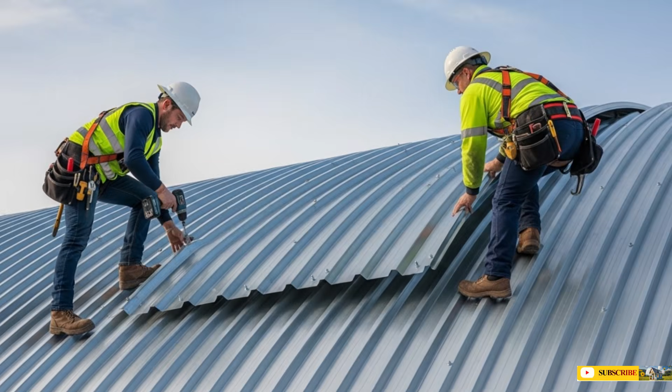Did you know that one of the smartest, most durable, and most eye-catching roofs you can put on a tiny house costs a fraction of what most people spend, installs faster than a traditional gable, and has been quietly holding up barns, silos, and military bunkers for over 80 years? We are talking about curved and arched roofs made from corrugated metal panels or repurposed silo material. And in 2026, this design is having a serious moment in the tiny home world, for very good reason.

If you have ever seen one of those swooping, dome-style tiny homes and wondered how it was built, what it costs, and whether you could actually do it yourself, then you are in exactly the right place. Stay with me to the very end of this video, because I'm going to break down the real numbers, the real challenges, and the real DIY possibilities that most builders never tell you about. This is the full picture, honest and data-backed, no hype.

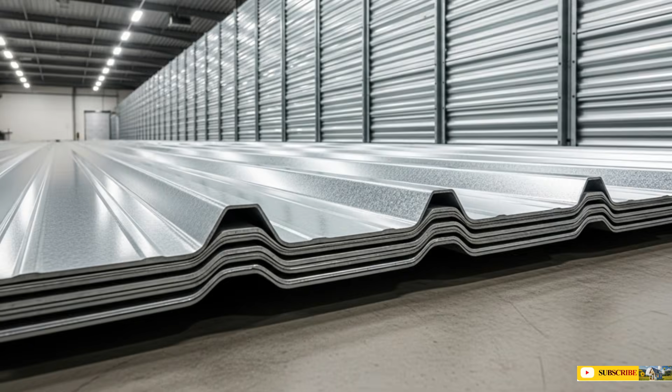When most people think of a tiny house roof, they picture a simple gable or maybe a shed-style pitch. Both work great. But a curved or arched roof is something different entirely. It is structural art, and the materials used to achieve it, specifically corrugated metal panels and repurposed grain silo sheeting, are genuinely brilliant choices for small structure builds. Today we are covering 4 big areas: what these roof systems actually are and where they come from, why they work so well on tiny homes, the real verified costs in 2026, and what a DIY build actually looks like step by step. Let's start with the basics.

A curved or arched roof follows a smooth arc instead of a peak or flat line. Think of an upside-down U or a gentle wave. On tiny homes, this can span the full width of the structure or serve as a partial accent over one section of the build. The shape is not just for looks. An arch is one of the strongest shapes in all of architecture. It distributes weight outward and downward along its curve, eliminating the need for internal supports or heavy ridge beams. That means more usable interior space and a lighter overall structure, both of which matter a great deal when you're building small. 2 main materials make this possible for tiny home builders in 2026.

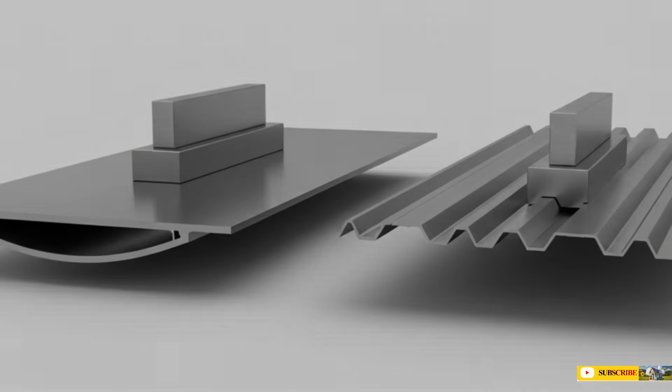Option 1, corrugated metal panels. These are the ridged or wavy metal sheets you have probably seen on old barns and sheds. The corrugation pattern is what gives them their structural strength. The wavy profile increases tensile strength dramatically compared to a flat sheet of the same thickness. And because metal is naturally malleable, these panels can be pre-curved or field curved to create smooth arching roof lines without welding or complex framing.

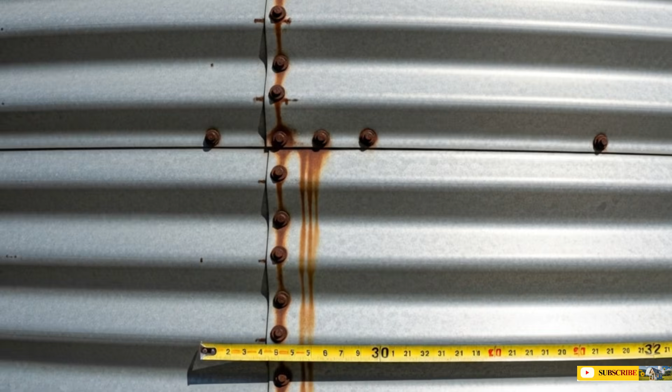In 2026, corrugated panels come in galvanized steel, Galvalume, aluminum, and pre-painted steel in dozens of colors. You can order them factory curved to your specified radius, or in some cases bend them on-site with a simple roller tool. Option 2, silo or grain bin material. This is where things get really interesting. Grain silos and bins are built from corrugated steel panels that are specifically engineered to form a curved, cylindrical structure. When those silos are decommissioned or replaced, their panels become available as salvage material at a fraction of new steel pricing. Builders have been repurposing these panels for decades, using them for everything from garden sheds to full residential homes.

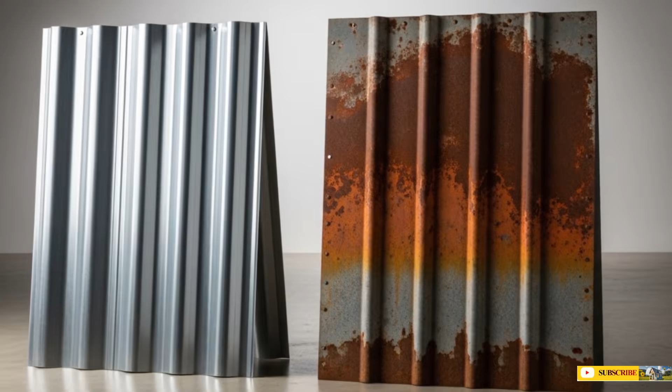For a tiny house roof, curved silo panels can be stacked and overlapped to create a beautiful arch profile that is incredibly sturdy and surprisingly affordable. Pro tip for 2026. Many modern silos use G115 or G90 galvanized coatings, which are superior industrial-grade coatings compared to standard roofing steel. When you source salvage silo panels, you are often getting higher-grade steel for lower-grade prices. That is a genuine value that most people overlook entirely.

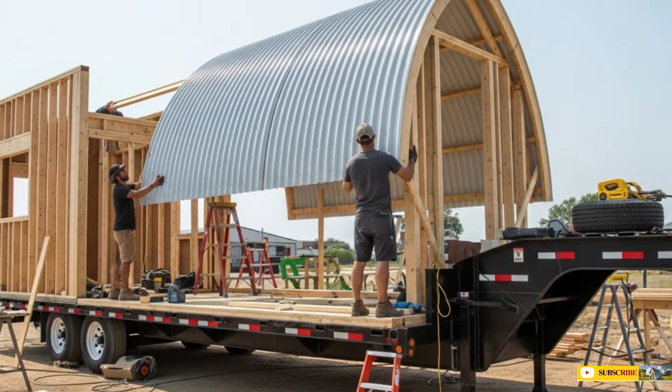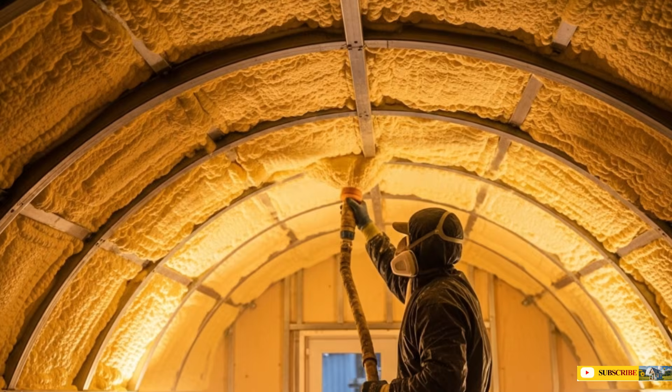There are 5 strong reasons why curved and arched roofs make a lot of sense, specifically for tiny home construction. Reason 1, structural efficiency. The arch distributes load beautifully without needing heavy rafters or ridge boards. On a tiny home where every pound of structural weight matters, especially if you're building on a trailer, this is a real advantage. Less framing weight means more weight budget for insulation, finishes, and living. Reason 2, headroom and loft space. One of the biggest complaints about tiny living is the feeling of being cramped.

A curved roof naturally creates more volume at the center of the space. Instead of steeply pitched walls cutting into your headroom, the arch gives you a wider usable zone at full standing height. This matters enormously when you are working with 200 to 400 square feet of living space.

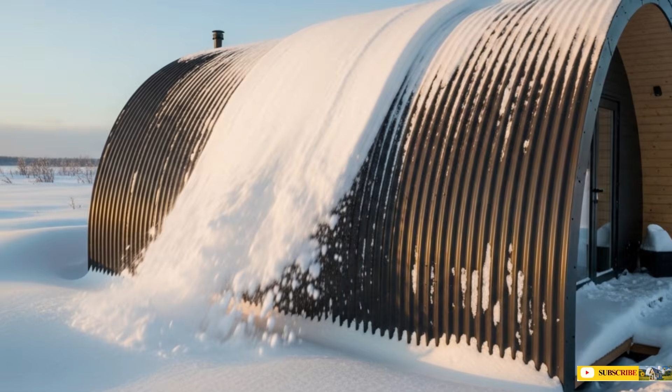Reason 3. Weather performance. The curved profile is exceptional at shedding water, ice, and snow. There are no flat valleys or complicated flashing points where water can pool and eventually find its way inside. Rain runs cleanly off the curve. Snow tends to slide naturally rather than accumulate, which is a major structural and maintenance advantage in cold climates.

Corrugated metal panels resist wind speeds up to 140 miles per hour when properly installed. The arch shape also reduces wind load by allowing air to move around the structure rather than pressing flat against it.

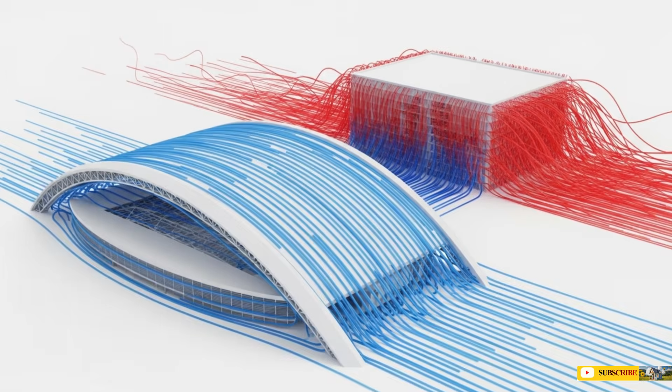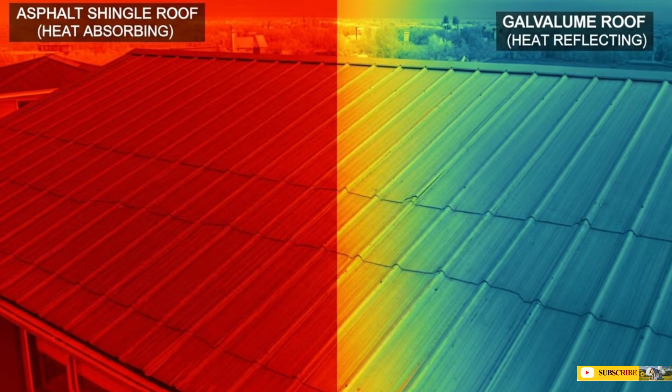Reason 4. Energy efficiency. Metal roofing reflects solar radiant heat rather than absorbing it. That reflective quality can reduce your cooling costs by 10 to 25% compared to asphalt shingles in most climates. In 2026, Cool Roof certified Galvalume panels in high sun states like Arizona and Texas have shown cooling cost reductions of up to 40%. For a tiny home where your energy costs are already modest, that is a meaningful long-term advantage.

The arch also creates a natural air gap between the metal surface and your interior ceiling, which helps with thermal performance when combined with proper insulation.

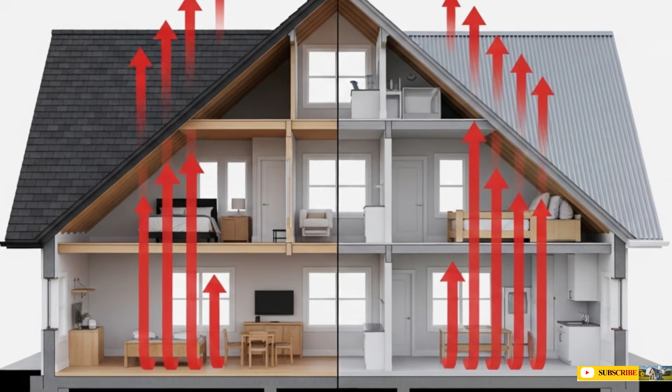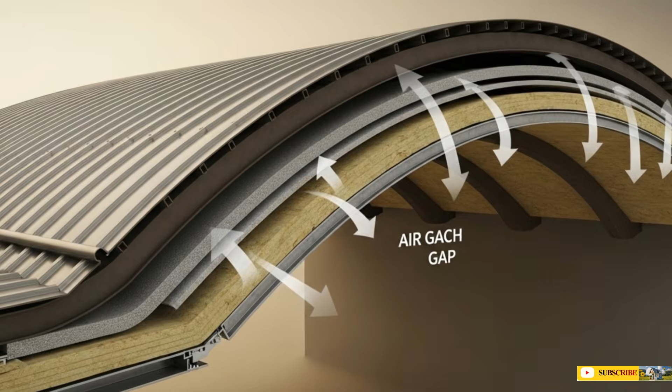Reason 5. Longevity. This is where metal roofing separates itself from everything else. Corrugated metal roofs last 40 to 70 years, depending on the material and coating. Galvanized steel gives you 40 to 50 years. Galvalume, which combines steel with an aluminum zinc alloy, extends up to 50 to 60 years. Aluminum in coastal environments can reach 60 to 70 years.

Compare that to the 15 to 25-year lifespan of a standard asphalt shingle roof, and the economics are stark. You may install a corrugated metal roof once and never need to replace it.

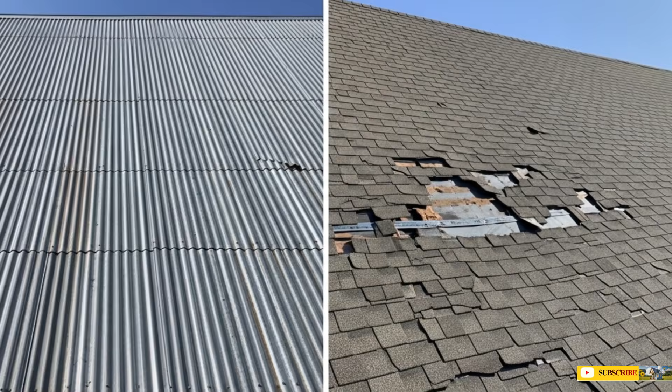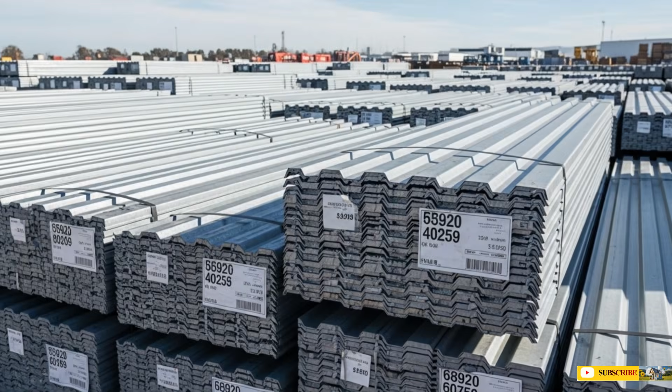Alright, let us talk numbers. These figures reflect the verified 2026 market, and I want to be precise because outdated pricing can seriously hurt your budget planning. Corrugated metal panels. Installed cost. For standard corrugated metal panels, the 2026 national average for galvanized steel, specifically R panel or 7/8 inch corrugated, runs between $5 and $12 per square foot installed. Material only for 26 gauge steel is hovering around $1.50 to $4.00 per square foot before installation labor.

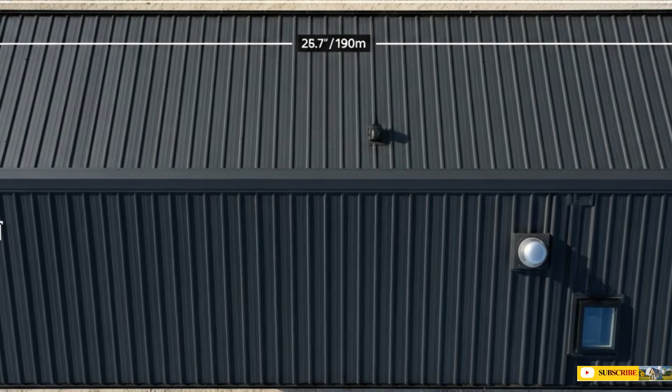Galvalume panels, which offer superior corrosion resistance and heat reflectivity, run approximately $6 to $13 per square foot installed. The premium over galvanized steel is real but modest, and for most tiny home applications the performance difference justifies the gap. For a typical tiny home roof surface of 300 to 500 square feet, panel materials alone can run roughly $450 to $2,000. Installation labor adds significantly on top of that if you are not doing it yourself.

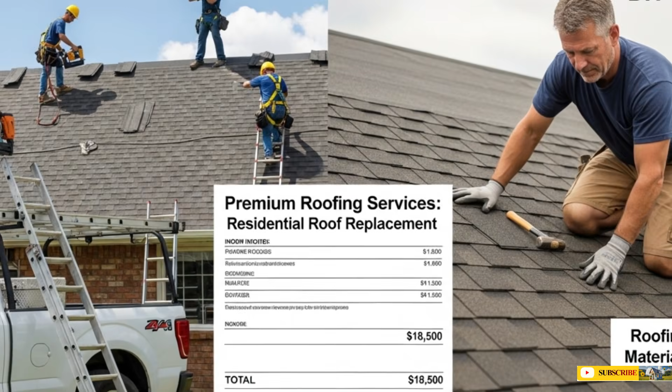Quonset-style arch kits. For a complete arch structure in kit form, a 20 by 30 Quonset package, which gives you 600 square feet and is a very workable tiny home footprint, currently retails between $12,000 and $15,000 for the shell. High volume and bulk buyers often see this drop to the $10,000 mark for the shell only. More than 75% of Quonset kit buyers assemble their structures themselves, which cuts project costs by 20 to 30% compared to hiring a contractor for the full build.

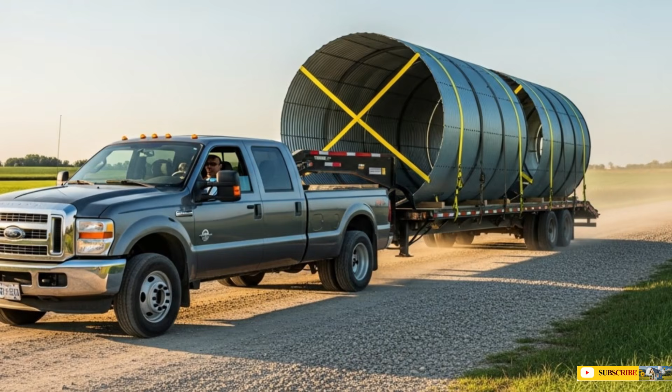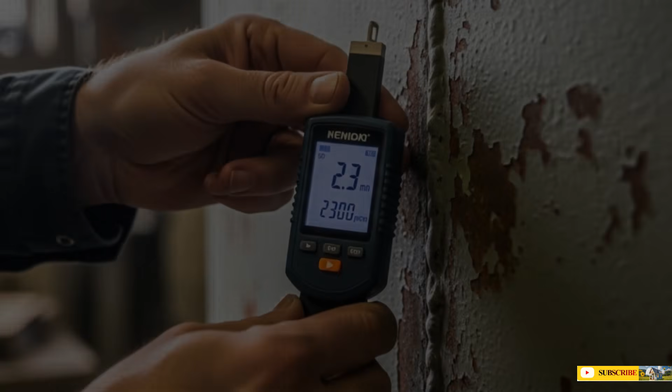Salvage silo panels. The budget option. Decommissioned grain bin and silo panels can be sourced for as little as $0.50 to $2.00 per square foot in rural markets where grain operations are common. You will need to factor in transportation, surface inspection, and additional sealing, but the raw material savings can be dramatic. And as I mentioned earlier, those salvage panels often carry industrial-grade G90 or G115 coatings, making this one of the best value plays in DIY tiny home roofing right now.

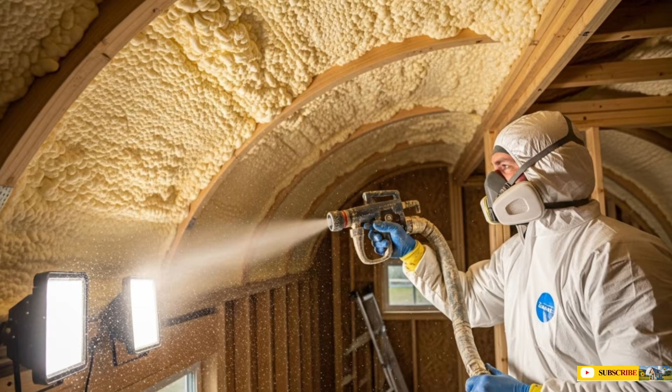Insulation cost update for 2026. Spray foam costs have shifted. Closed-cell spray foam, which is the preferred choice for metal roof applications because it acts as both insulation and a vapor barrier, is currently averaging $2.00 to $5.00 per square foot for a standard 2-inch thickness.

For a complete tiny home insulation job, the total installed cost typically lands between $3,000 and $6,000 when you factor in full roof coverage. Fiberglass batt insulation remains an option at lower upfront cost, but for a curved metal roof where vapor management and thermal bridging are real concerns, closed-cell spray foam is the more reliable long-term choice.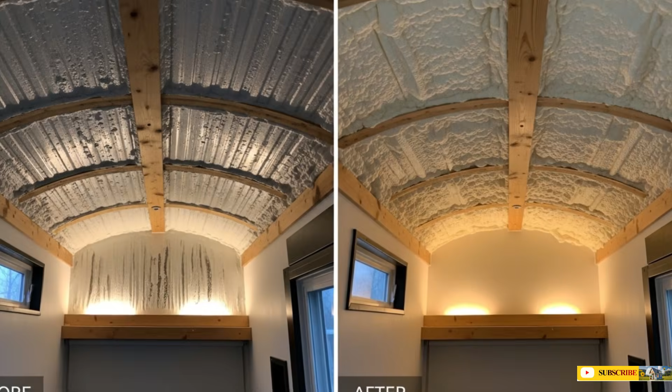An honest caveat: steel prices continue to respond to global supply and demand. The ranges shared here are solid 2026 reference points, but always get current quotes from local suppliers before finalizing your budget. Your actual numbers will depend on your location, project size, and market conditions at the time of your build.

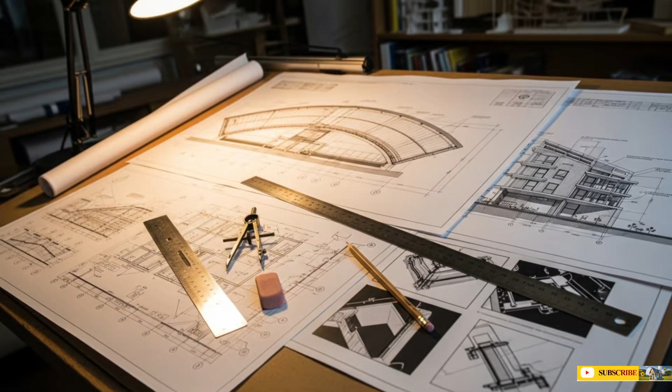This is the section I really want you to pay close attention to, because there's a right way and a wrong way to approach a curved roof build. Step 1. Design and engineering. Before you touch a single panel, you need a plan. Curved roofs require a defined radius, and that radius determines your framing, your panel specifications, and your structural load calculations. If you're using a Quonset kit, the engineering is done for you.

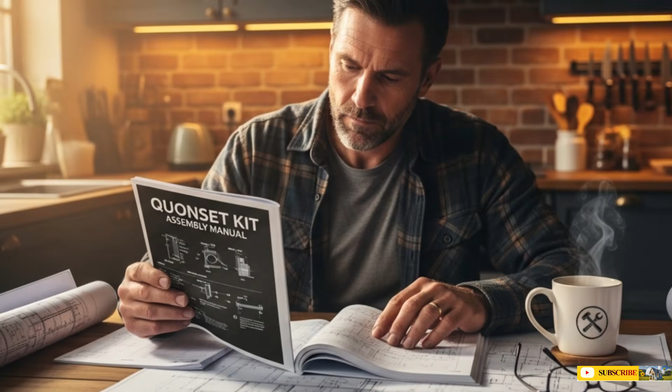If you are custom designing a curved roof over a traditionally framed tiny home, you either need to work with a structural engineer or use an established design template with a stamped approval. Do not skip this step. The arch is exceptionally strong, but only when it is correctly proportioned and anchored.

In 2026, most jurisdictions following the IRC 2021 or IRC 2024 building code, including the Appendix Q provisions that govern many tiny homes, require engineer-stamped drawings for unconventional roof structures. Getting that stamp early saves you from expensive redesigns later and adds credibility and authority to your build documentation.

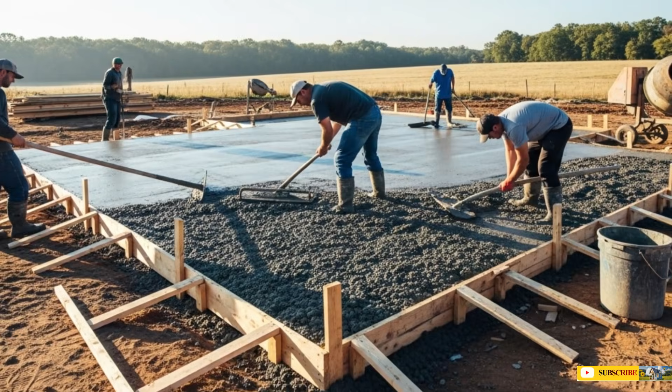Step 2. Foundation and base frame. Your curved roof needs a solid base to attach to. For a tiny home on a trailer, this means a robust steel chassis with properly engineered wall plates. For a ground-level build, a concrete perimeter foundation or full slab is standard. The arch panels transmit their load outward at the base, so those connection points need to be rated correctly for your local wind and snow loads.

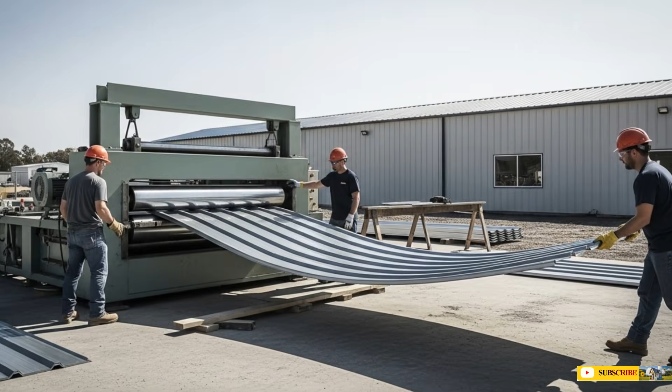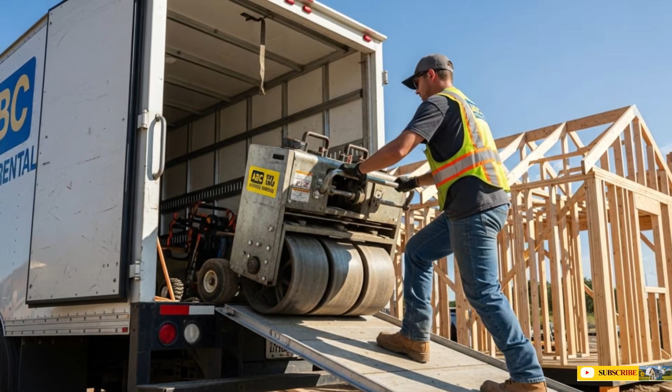Step 3. Panel curving. If you are not using pre-curved panels, field forming happens at this stage. A metal roller or slip roller bends flat corrugated panels to your desired radius. This can be done on-site with rented equipment. The key is consistency. Each panel needs to match the same curve, so your roofline is smooth and uniform. Pre-curved panels ordered from a manufacturer eliminate this step, but add to material and freight costs, since curved panels take up significantly more shipping space than flat ones.

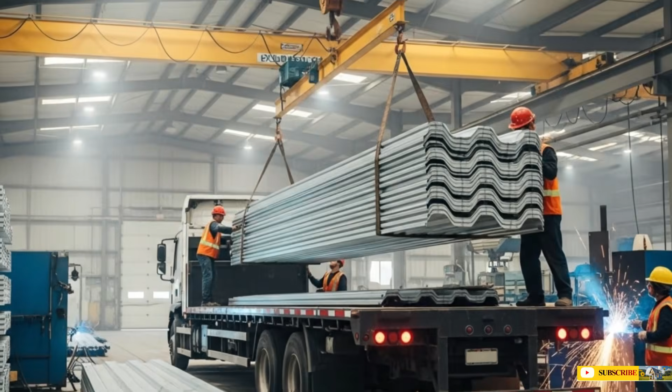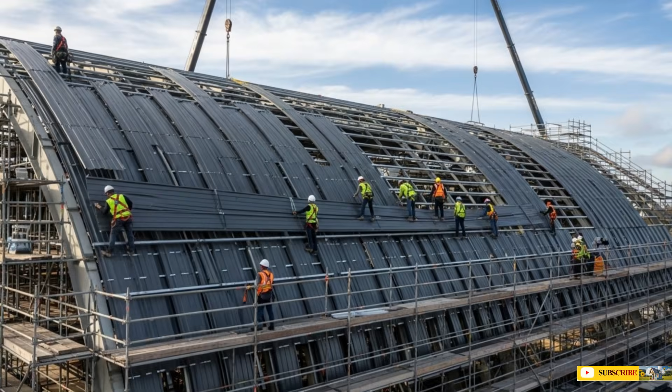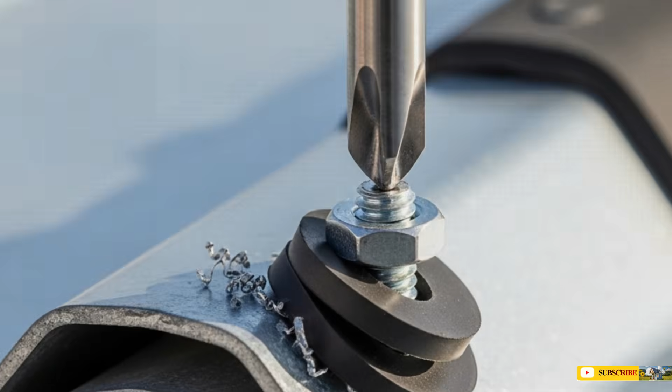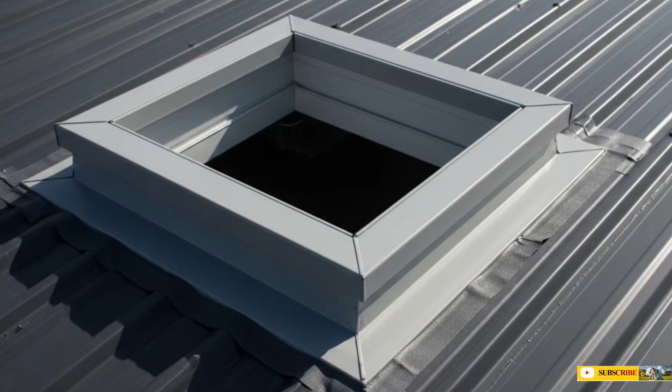Step 5. Sealing and flashing. Seams, edges, and any penetrations for vents, skylights, or chimney pipes need proper flashing and sealant. Butyl tape and metal-compatible caulk are your core materials here. Take your time with this step. The curved profile keeps water runoff clean, but any penetrations need the same careful treatment you would give on any other quality roofing system.

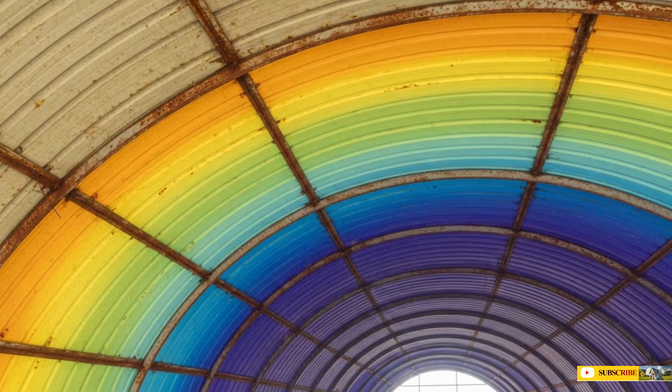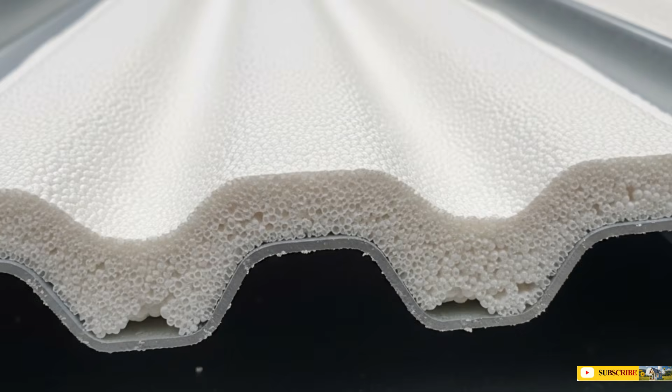Step 6. Insulation. Corrugated metal on its own provides essentially no insulation value. You need insulation beneath the panels, and for a curved metal roof, the choice matters more than people realize. Closed-cell spray foam at $2 to $5 per square foot installed is the preferred option. It bonds directly to the curved metal interior surface, fills every gap, acts as a vapor barrier, and turns the whole roof assembly into a continuous thermal shell.

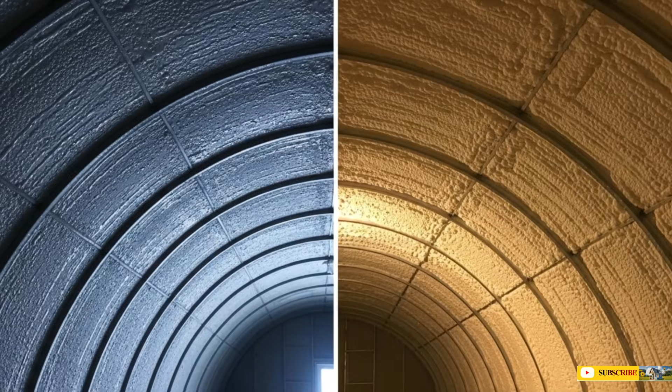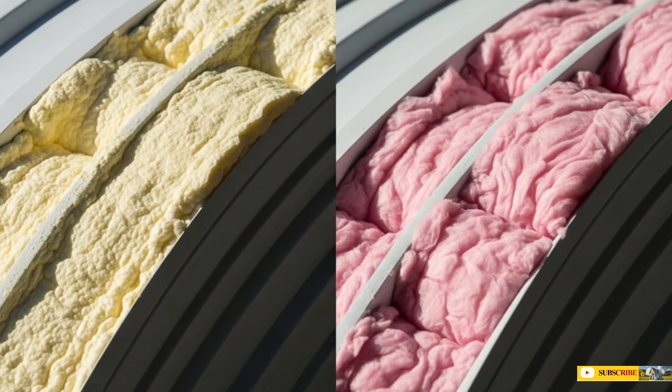For a tiny home where temperature control and moisture management are priorities, this investment pays back over time in energy savings and reduced maintenance. Fiberglass batt is less expensive up front, but requires very careful vapor management with metal roofing, and does not conform as cleanly to a curved surface. If the budget requires it, it can work, but plan for additional air sealing labor.

Snow load and snow guards. The smooth curved surface is excellent at shedding snow, but that also means when snow releases, it comes off fast.

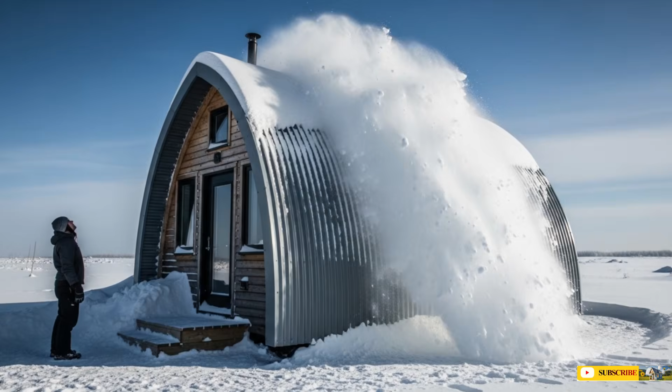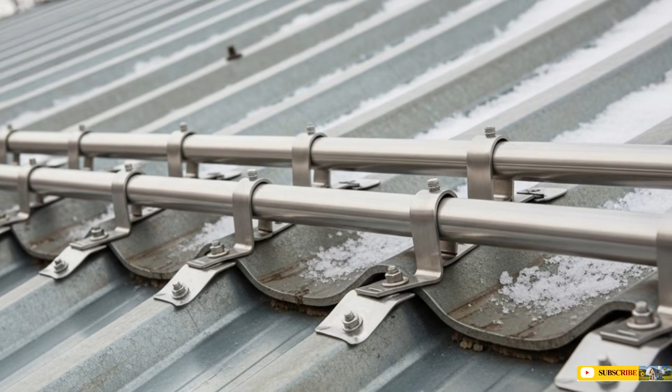In 2026, local codes in the Pacific Northwest, the Northeast, and other high snowfall regions increasingly require snow guards on metal roofs that overhang walkways, driveways, or entries to prevent what is sometimes called a roof avalanche. If people or vehicles pass near your tiny home in winter, snow guards are not optional. Build them into your plan and budget from the start.

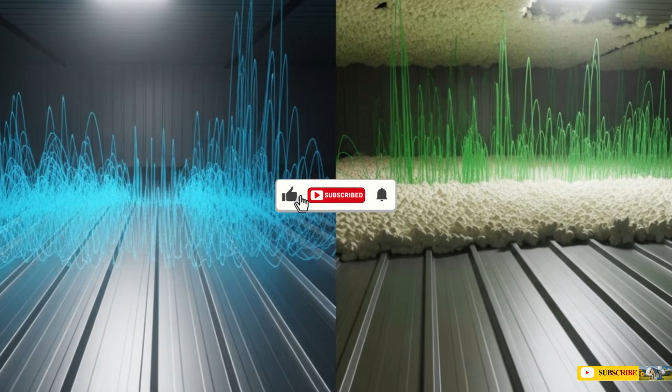Noise. Metal roofs are noisier than asphalt shingles during heavy rain. Some people find this deeply satisfying. Others find it disruptive to sleep or work. Proper insulation, particularly closed-cell spray foam applied directly to the metal interior, significantly reduces sound transmission. If noise sensitivity is a concern, factor that insulation mass into your build from day one rather than trying to solve it afterward.

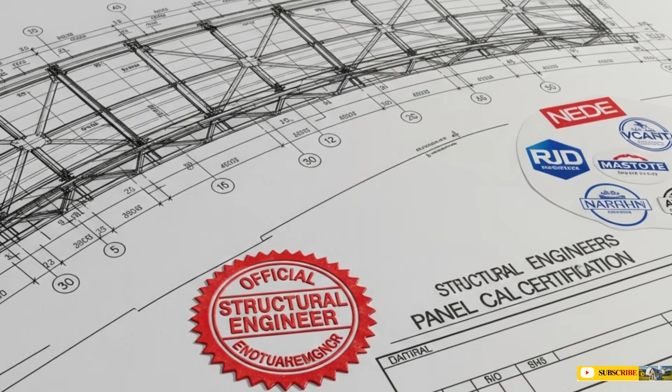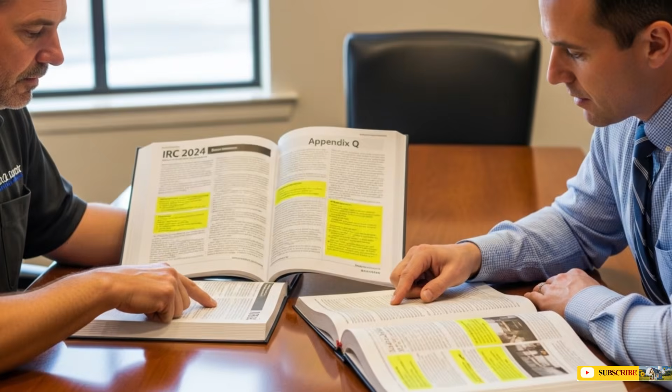Permitting and code compliance. Curved and arched roofs are not always covered by standard residential building codes. Depending on your jurisdiction, you may need engineer-stamped drawings and specific panel system certifications. Reference Appendix Q of the IRC 2021 or 2024 when talking with your local building department, as this appendix specifically governs tiny homes and loft structures. Acknowledging that your build will carry a structural engineer stamp signals to inspectors that you are building to code and adds real authority to your project.

Aesthetics and resale. Curved roofs are distinctive. That is part of the appeal, but distinctiveness can be polarizing in some real estate markets. If your tiny home is going on a foundation as a permanent dwelling, think about how the roofline interacts with your neighborhood context and long-term plans. If it is on a trailer as a vacation rental or mobile home, the unique look is often a genuine selling and marketing advantage.

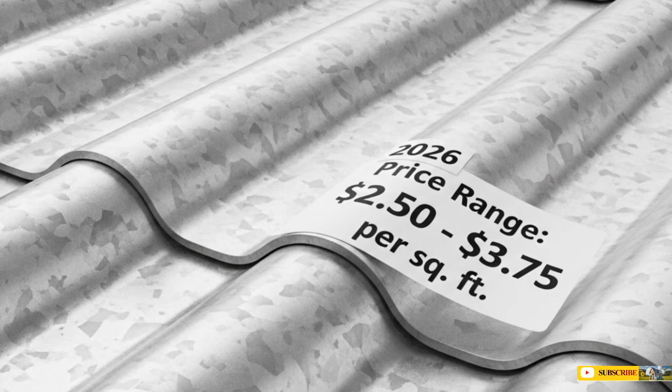Galvanized steel corrugated panels. Installed cost: $5 to $12 per square foot. Lifespan: 40 to 50 years. Best for budget builds and inland locations. Limitation: can develop white rust in coastal or high humidity environments.

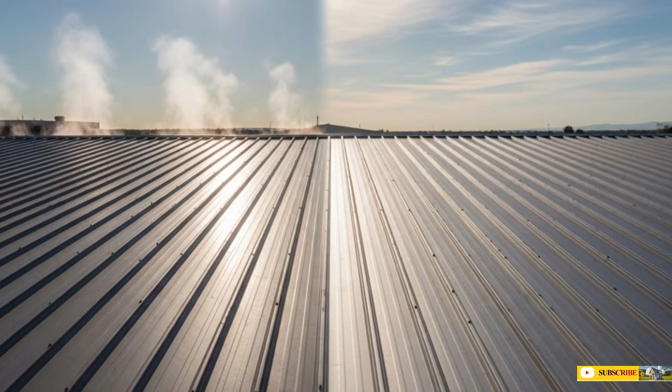Galvalume corrugated panels. Installed cost: $6 to $13 per square foot. Lifespan: 50 to 60 years. The recommended all-around choice for most tiny home applications in 2026. Benefit: superior heat reflectivity and corrosion resistance over standard galvanized steel. In high sun climates, certified Galvalume can cut cooling costs by up to 40%.

Aluminum corrugated panels. Higher upfront cost. Lifespan: 60 to 70 years in coastal environments. Best for oceanfront or high humidity locations. Naturally rust-proof. Note: softer than steel and more susceptible to denting from impact, so consider your environment carefully.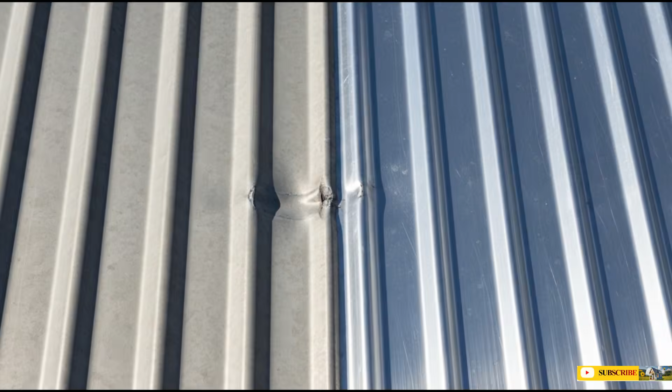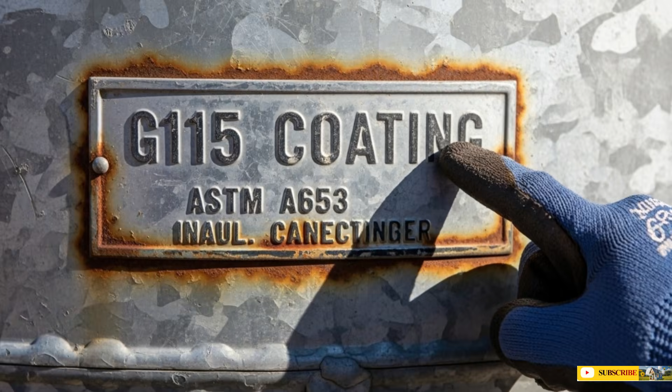Salvage silo steel. Raw cost: $0.50 to $2.00 per square foot, depending on regional availability. Lifespan: dependent on the condition and existing coating of the source material. Best for resourceful builders with access to rural salvage markets. Key advantage: salvage silo panels often carry G90 or G115 industrial-grade galvanized coatings, making them a better-than-standard product at a below-market price.

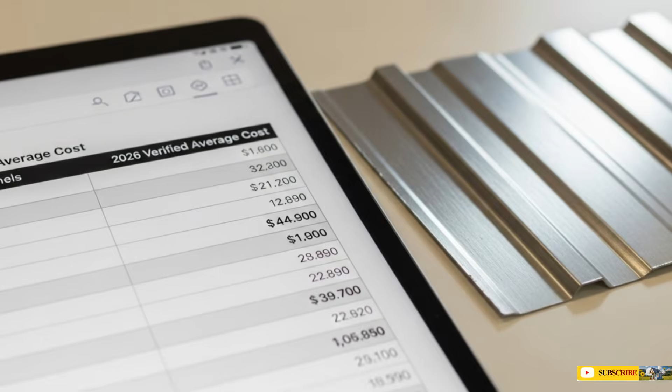Verified 2026 cost comparison. Galvanized steel installed: $3 to $7 per square foot, $5 to $12 per square foot. National average for R-panel, or 7 out of 8 corrugated. Galvalume installed: $4 to $8 per square foot, $6 to $13 per square foot. Superior corrosion resistance and heat reflectivity.

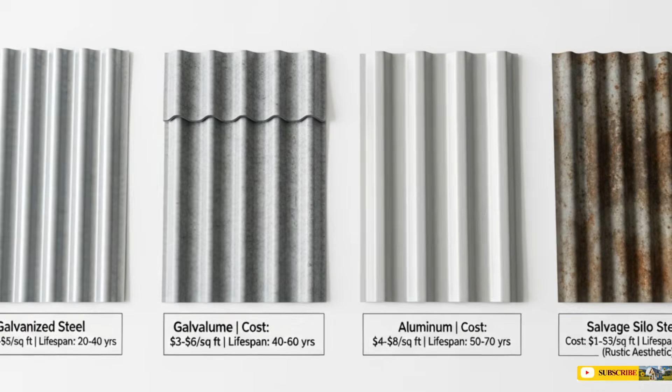Quonset kit: 600 square foot shell, $12,000 to $18,000, $12,000 to $15,000. High volume sales can bring this to $10,000. Spray foam, closed cell installed: $5 to $12 per square foot, $2 to $5 per square foot. Standard 2-inch closed cell layer. Full tiny home job is $3,000 to $6,000.

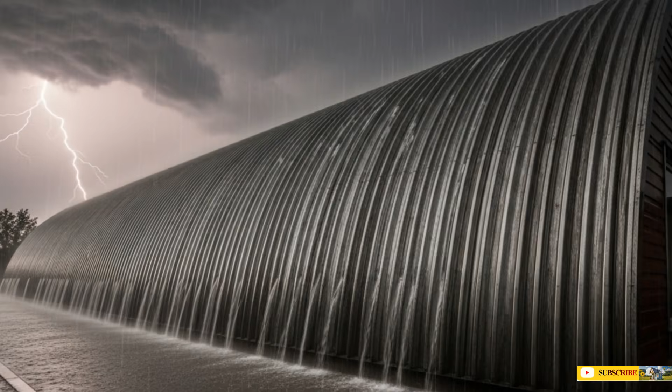Here is the bottom line on curved and arched roofs for tiny homes. This is not a gimmick, and it is not a trend. It is a proven building approach that has been keeping structures weather-tight for generations, and is now showing up in some of the most creative and affordable tiny homes being built today. The corrugated metal panels and silo material that make these roofs possible are durable, cost-effective, DIY-friendly, and genuinely beautiful in a raw, honest way. The arch shape gives you structural efficiency, headroom, and weather performance that a standard gabled roof cannot match at the same price point.

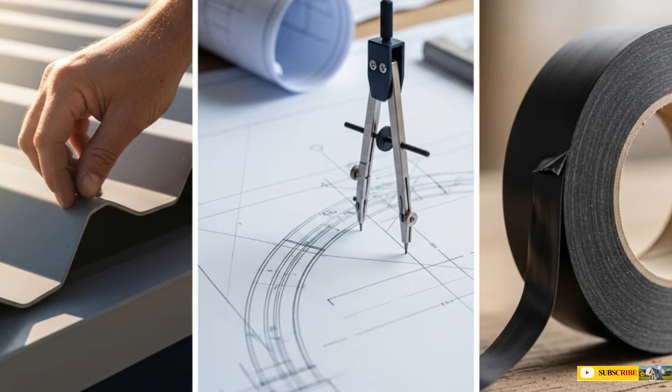In 2026, with housing costs still pressing hard on people who want to build smart and live on their own terms, this kind of thinking, using honest materials, proven shapes, and a little resourcefulness, is exactly what the tiny home movement is about.